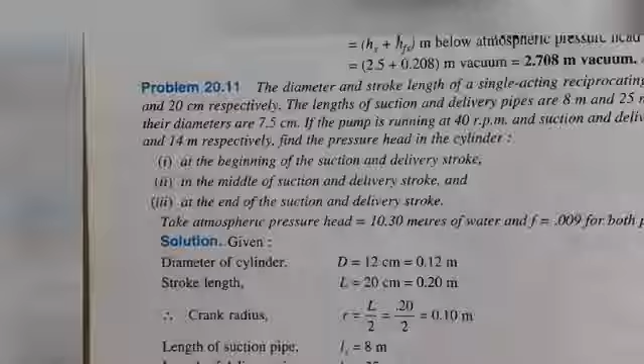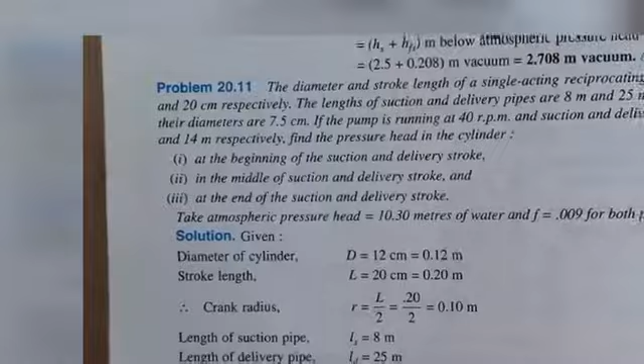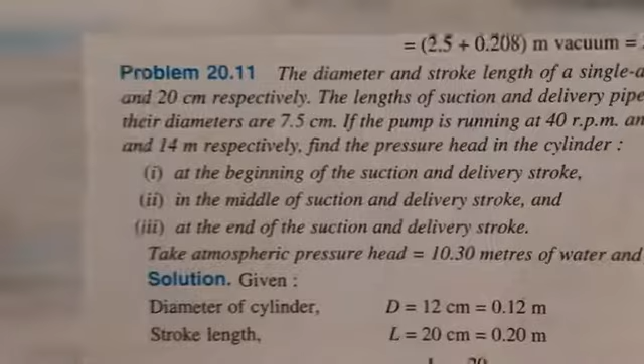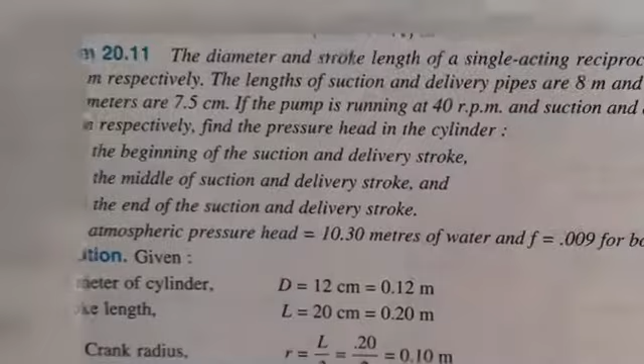Question: The diameter and stroke length of a single acting reciprocating pump are 12 cm and 20 cm respectively. The length of suction and delivery pipes are 8 meter and 25 meter respectively, and their diameters are 7.5 centimeter. If the pump is running at 40 rpm and suction and delivery head are 4 meter and 14 meter respectively,

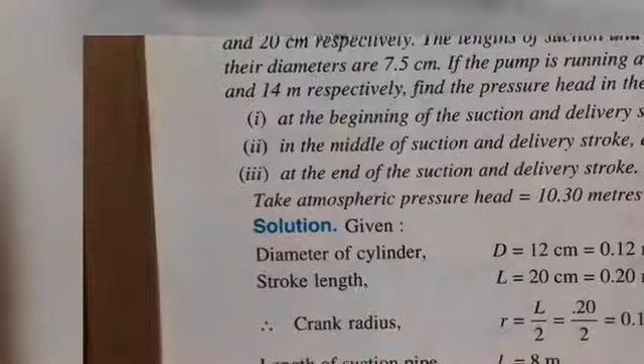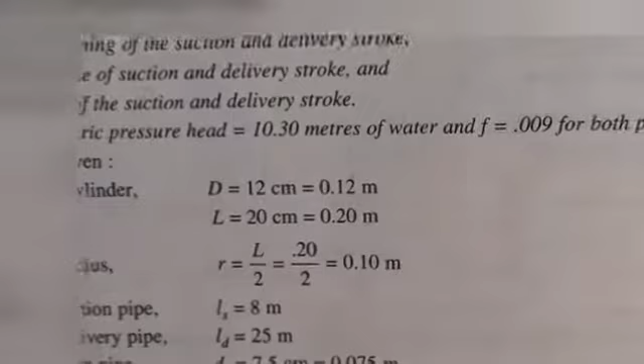find the pressure head in the cylinder first at the beginning of suction and delivery stroke, second in the middle of suction and delivery stroke, third at the end of suction and delivery stroke. Take atmospheric pressure head equal to 10.3 meters of water and f equal to 0.009 for both the pipes.

Now the data given are: diameter of cylinder is given as 12 centimeter equal to 0.12 meter. Length of stroke is given 20 centimeter equal to 0.2 meter. Crank radius is L by 2 equal to 0.1 meter, 10 centimeter. Length of suction pipe LS is given 8 meter. Length of delivery pipe LD is given 25 meter.

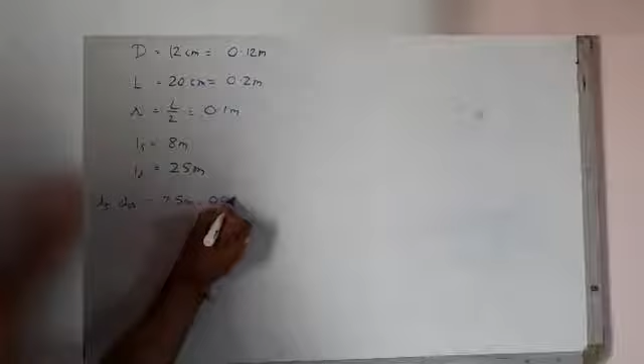Dia of suction and delivery pipe DS and DD both are 7.5 centimeter equal to 0.075 meter. Speed N equal to 40 rpm. Suction head HS is given 4 meter and delivery head HD is given 14 meter. Atmospheric pressure head H atmospheric equal to 10.3 meter of water, and coefficient of friction is given 0.009.

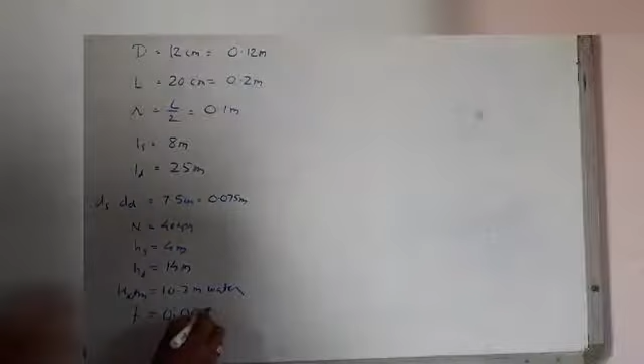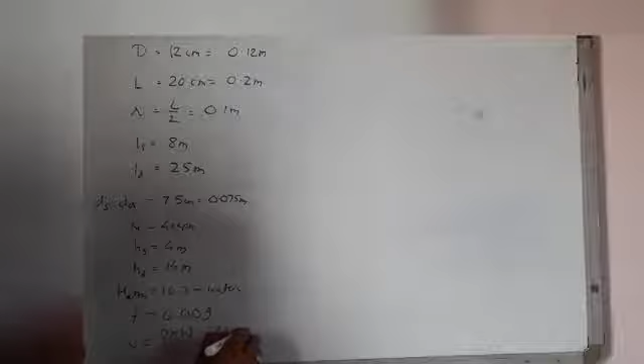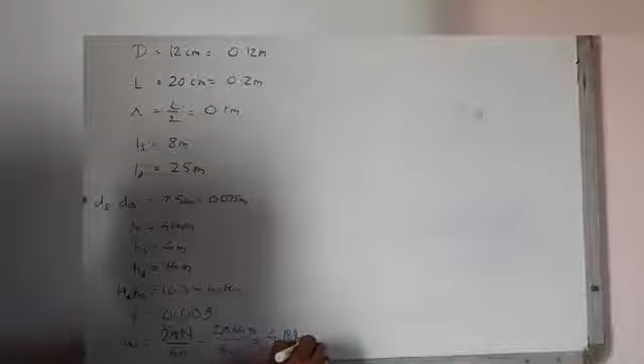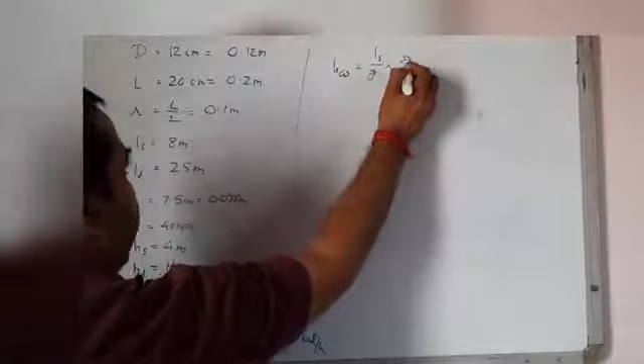And as we know, omega equal to 2 pi N by 60, so 2 pi into 40 by 60, so the value of omega is 4.188 radian per second. Now HAS, the pressure head due to acceleration in suction pipe, is obtained from the equation HAS equal to LS by g into A by AS into omega square r cos theta.

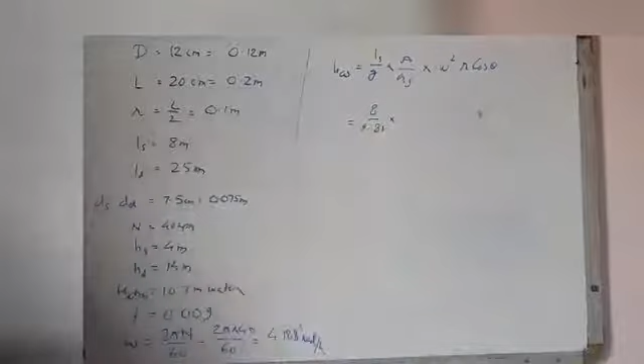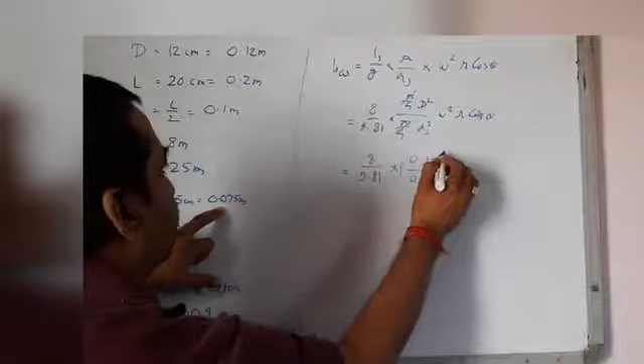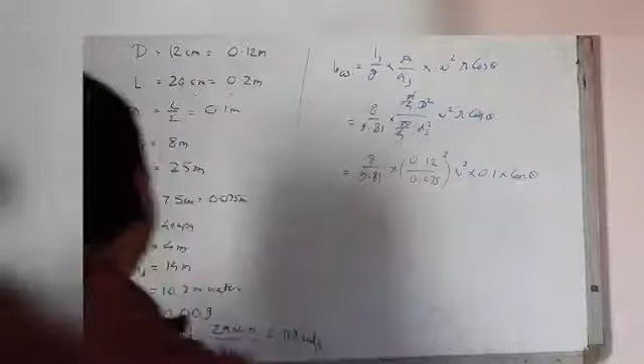Putting the values here, this is 8 by 9.81, and the areas are pi by 4 d square by pi by 4 ds square, omega square r cos theta. So 8 by 9.81 into d is 0.12 by ds is 0.075 square, omega square into r is 0.1 into cos theta. Now this value comes 3.66 cos theta.

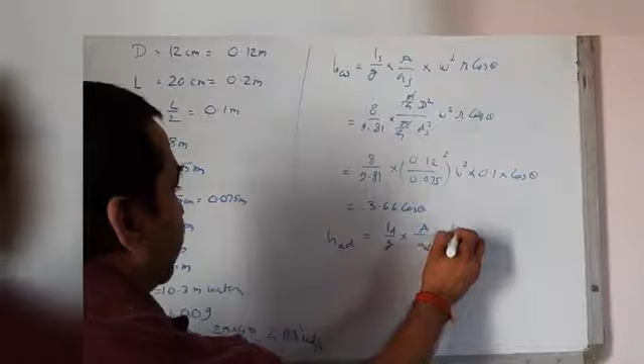Similarly, pressure head due to acceleration in delivery pipe is given by the equation HAD equal to LD by g into A by AD omega square r cos theta. Putting the values here, this is 25 by 9.81 into pi by 4 d square by pi by 4 dd square omega square r cos theta, that is 25 by 9.81 into d is 0.12 by 0.075 square omega square r cos theta.

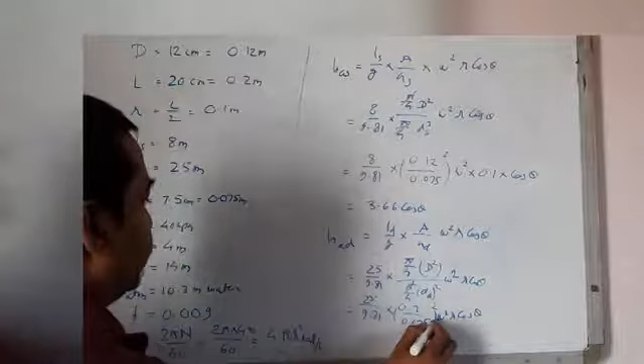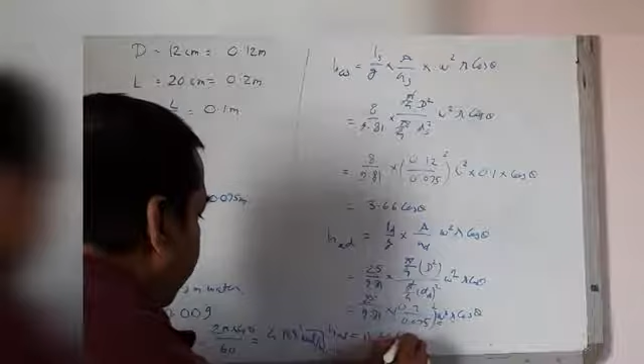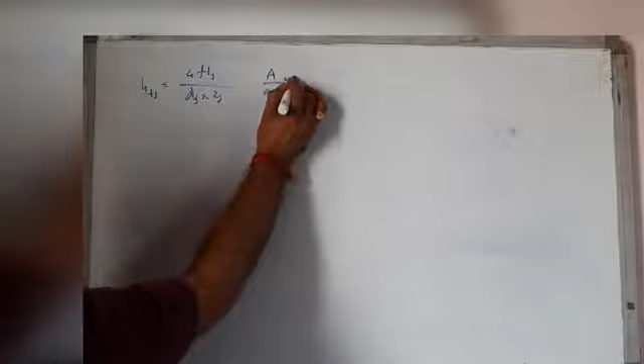Putting the values here, omega and r, so HAD is equal to 11.44 cos theta. Now for the loss of head due to friction in suction pipe, HFS equal to 4 f LS by ds into 2g, into A by AS omega r sin theta whole square.

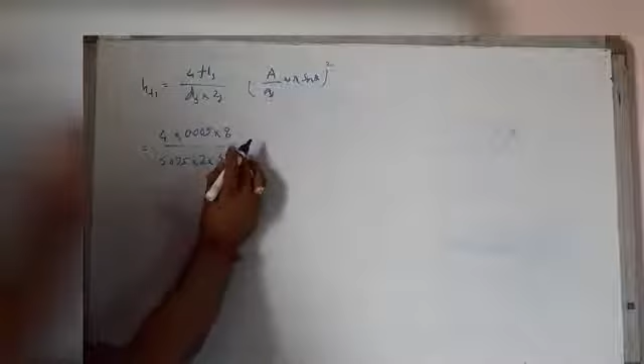Putting the values here, 4 into 0.009 into 8 by 0.075 into 2 into 9.81 into pi by 4 d square by pi by 4 ds square into omega is 4.188 into 0.1 sin theta, this whole square. Pi by 4 cancel. Now this value comes 0.225 sin square theta.

Similarly, loss of head due to friction in delivery pipe is obtained by HFD equal to 4 f LD by dd into 2g, into A by AD omega r sin theta whole square.

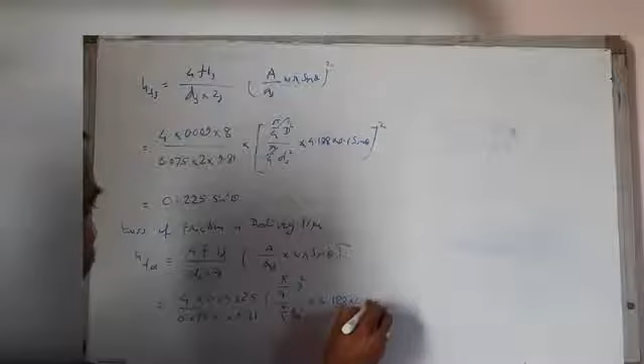Putting the values here, 4 into 0.009 into 25 by 0.075 into 2 into 9.81, pi by 4 d square by pi by 4 dd square, into omega is 4.188 into 0.1 is r into sin theta whole square. Pi by 4 cancel. Now the value of HFD comes 0.703 sin square theta.

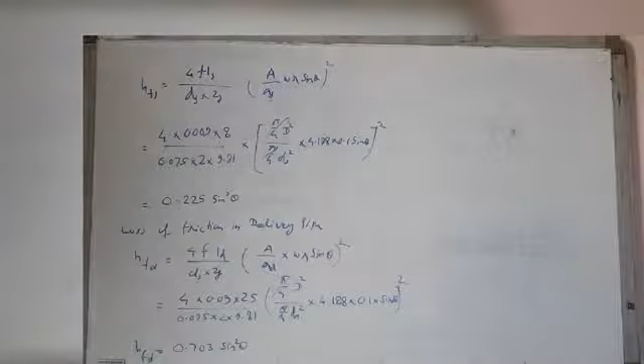Now the pressure head in the cylinder at the beginning of suction and delivery stroke. Here theta is equal to 0, so the value of HAS is equal to 3.66 cos 0 equal to 3.66 meter, and HAD equal to 11.44 cos 0 is equal to 11.44 meter.

Pressure head in the cylinder at the beginning of suction stroke is HS plus HAS below atmospheric pressure head, which is equal to H ATM minus HS plus HAS meters absolute. So putting the values, this is 10.3, HS is 4 and HAS is 3.66. So this is 10.3 minus 7.66, equal to 2.64 meter absolute.

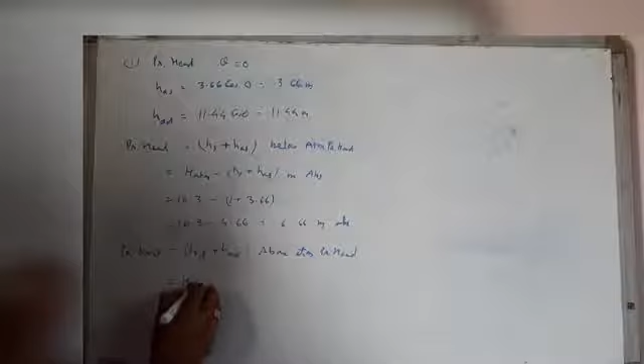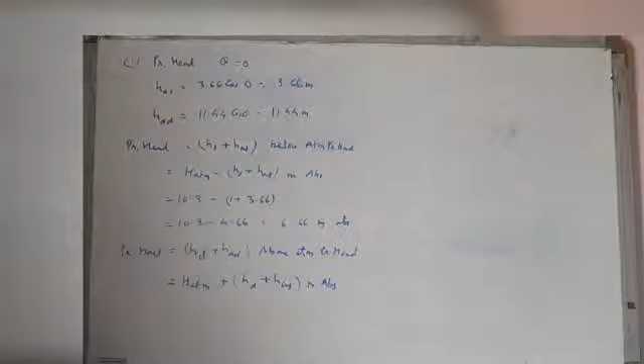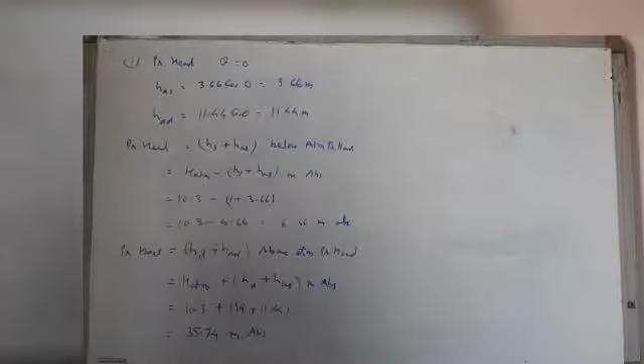Now pressure head in the cylinder at the beginning of delivery stroke: pressure head equal to HD plus HAD above atmospheric pressure head. So this is equal to H atmospheric plus HD plus HAD meter absolute. So this is 10.3 plus 14 plus 11.44. This comes 35.74 meter absolute.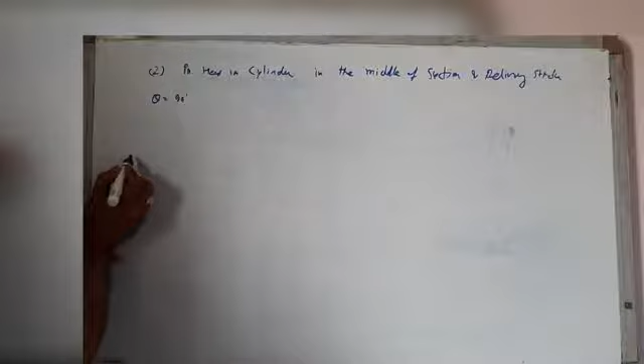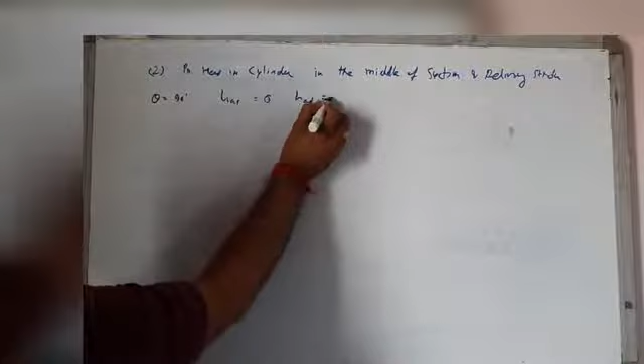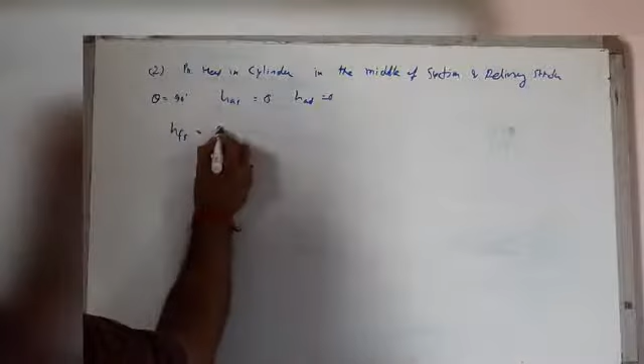Second, pressure head in cylinder in the middle of suction and delivery stroke. Here theta is equal to 90 degree. So HAS equal to 0, HAD is equal to 0, and HFS is equal to 0.225 sin square 90, that is equal to 0.225, and HFD equal to 0.703 sin square 90, this is equal to 0.703.

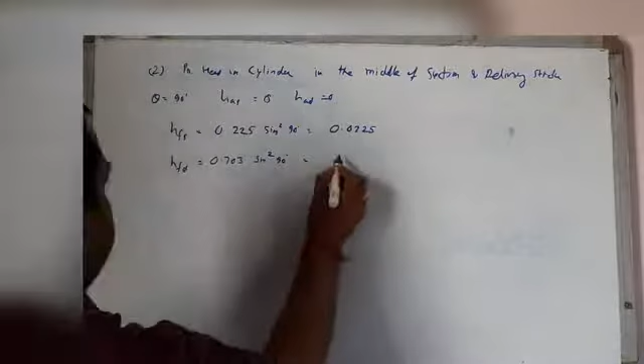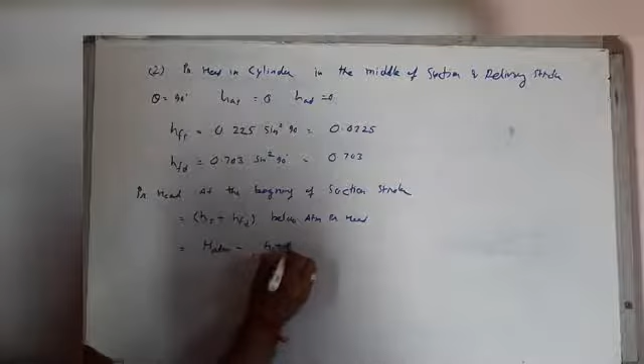Pressure head in cylinder in the middle of suction stroke equal to HS plus HFS below atmospheric pressure head. So this is H atmospheric minus HS plus HFS meter absolute, equal to 10.3 minus 4 plus 0.225, which is equal to 6.075 meter absolute.

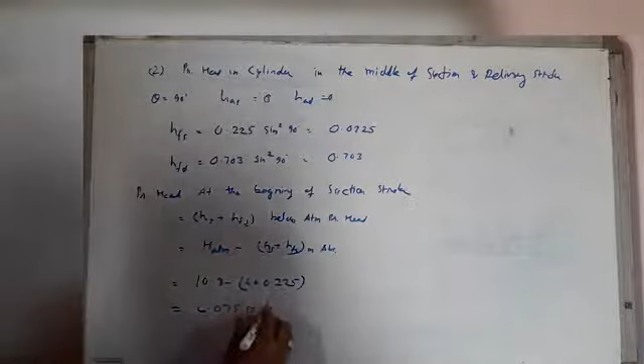Next, pressure head in the cylinder in the middle of delivery stroke. That is equal to HD plus HFD meter above atmospheric pressure head. So this is H atmosphere plus HD plus HFD, that is equal to 10.3 plus 14 plus 0.703, equal to 25.003 meter absolute.